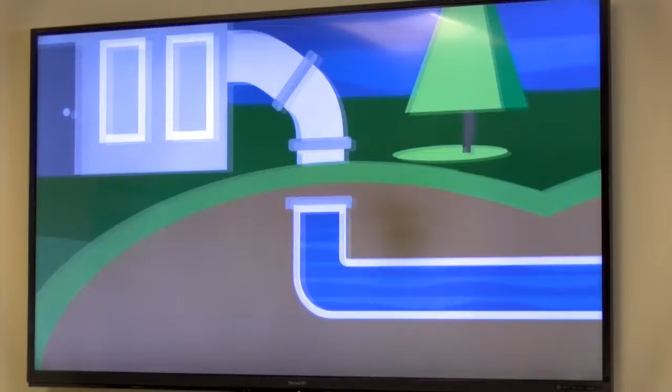By damming several small tributaries of the Escatawpa River, the waters backed up and began to expand. The ultimate result being a 3,600 square acre lake. Today, this lake is known as Big Creek Lake. The new infrastructure began with the intake facility on the far eastern edge of the lake. Featuring pumps powered by 800 horsepower engines, this lakeside facility is more than capable of meeting the needs of the metropolitan and ever-expanding Mobile region.

Equipped with the latest technology, including two 60-inch diameter pipes leaving the Gaillard pumping station for our Myers and Stickney reservoir facilities, the combined capability of the two facilities is a whopping 90 million gallons per day, but the typical demand for MAWSS customers is 5,000 gallons a month. At the Stickney and Myers reservoirs, the water is clarified, filtered, and disinfected. Our treated water from these two facilities exceeds federal guidelines and standards and is subjected to constant tests throughout the time spent at the reservoirs.

This process takes 7 to 15 hours, and water is then held in reservoirs before leaving on the last leg of the journey to your home or place of work. The water makes a trip through thousands of miles of underground pipes to customers throughout our community. This is the same water that you use in your kitchen to clean your clothes, to water your lawns, and is used to extinguish fires.

Delivering millions of gallons of water daily is only half our job at MAWSS. Every time you take a shower or flush your toilet, you send wastewater to our treatment facility. All wastewater must be cleaned and treated by rigorous environment-friendly standards so the water is healthy before returning back to nature. We have two wastewater treatment facilities in Mobile, Wright Smith and C.C. Williams wastewater treatment facilities. Here, particles are removed and the wastewater is clarified and treated.

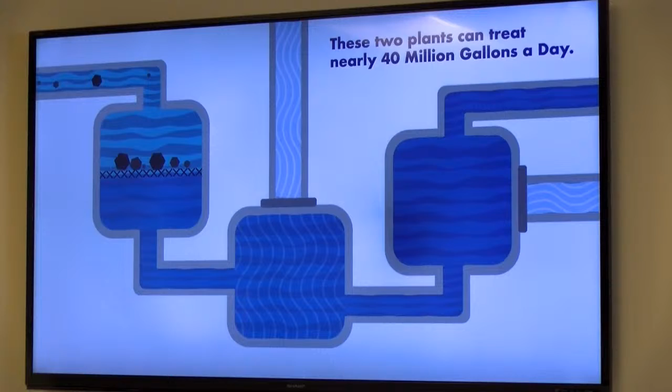This is critical for our environment and our community health. Providing clean, quality water and treating wastewater are important jobs. We are proud of what we do and the hundreds of safety-conscious MAWSS team members who are hard at work around the clock to bring Mobilians the sparkling, clean, refreshing water they depend on. We realize the important service we provide and never forget our work is only noticed if quality water is not meeting or exceeding standards, and that's truly a good thing.

What's on the screen is a summary of our assets. To understand the magnitude of our system, we have the raw water system, which includes Big Creek Lake, some pumping stations, some reservoirs, and 56 miles of pipeline from Big Creek Lake and the Mobile River systems, which are our raw water systems.

In our potable water system, we have 2 water treatment plants, the Stickney and the Myers, and about 1,605 miles of main pipeline, but I'm going to talk a little bit later about additional pipeline that adds to that and nearly doubles it. Then we have booster stations, 5 ground storage tanks, 9 elevated storage tanks, 3 reservoirs, 32,000 valves in this system.

12,500 fire hydrants roughly. And in the wastewater system, we have the C.C. Williams wastewater treatment plant, the Wright Smith wastewater treatment plant, 193 lift stations, 220 miles of force main attached to those lift stations, and 1,280 miles of gravity sewer main, 29,000 manholes roughly, 99,000 service laterals, 2 severe weather attenuation tanks, 3 decentralized systems.

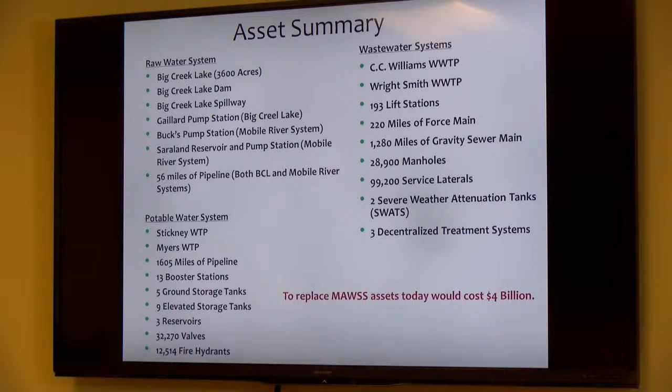When we did our master plan, one of the things we did was value our assets, and the consultants who studied the system determined that it would cost $4 billion to replace this system today. So that gives you a little bit of an idea of how big this system is and the value of it. I'm just going to walk through some aerial photographs of our system.

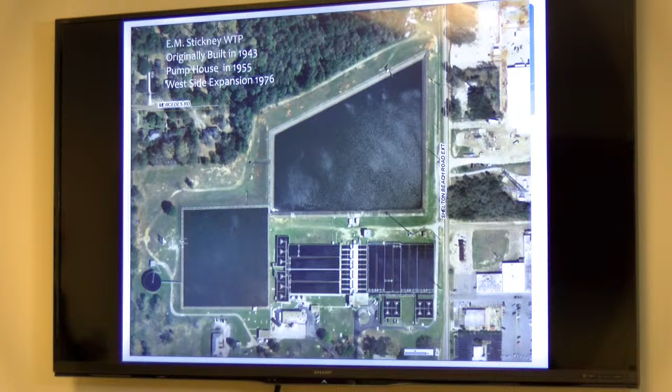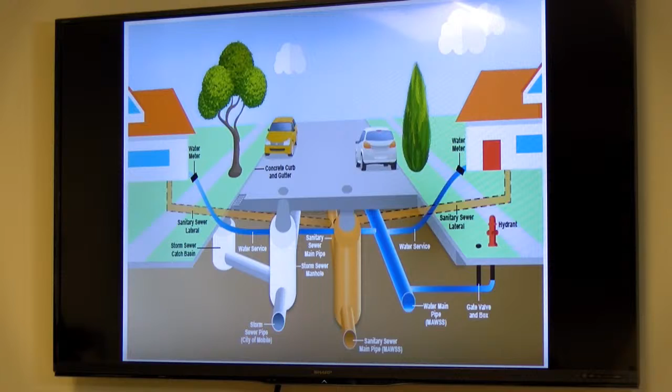What we'd like for the public to understand is that it's difficult to know as a customer what the condition of our assets is, because our most expensive assets are our pipelines. What this picture illustrates is that we have a separate water main that feeds services to homes. There is a separate stormwater system which is operated and owned by the city. And then there's a sanitary sewer system that provides laterals to homes and buildings that brings the wastewater to MAWSS for treatment.

This is a map that shows our water lines, and the water lines are aged. Some of them are over 100 years old. As this particular slide shows, we have 195 miles of cast iron water line that's over 100 years old, and then much more pipe than that, about 650 miles of pipe that's 50 to 99 years old.

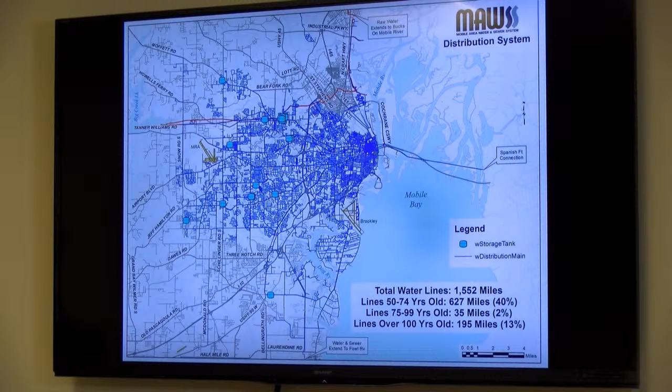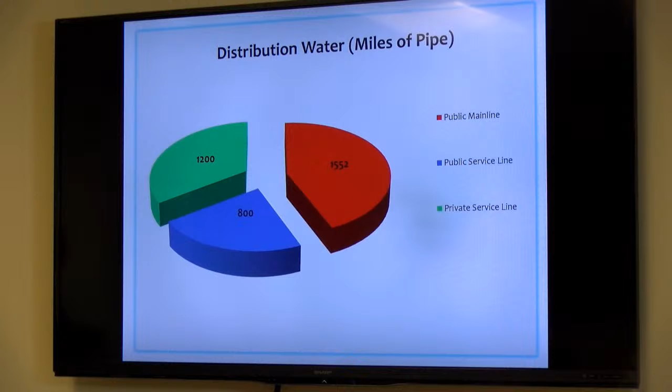The distribution system is made up of the water mains that bring water to the location of the house. Then we have the public service line that feeds water from the water main to the property line, and the private service line that takes that water from the property line into the home or building. Altogether, there's a total of roughly 3,500 miles of line necessary to serve water to the community.

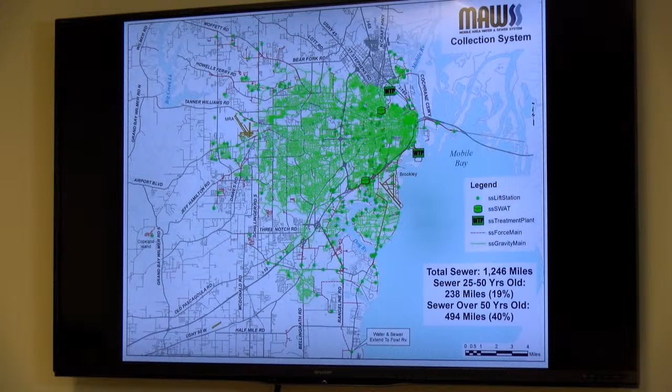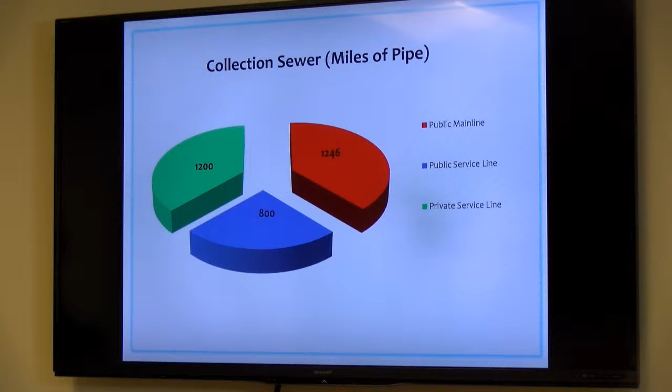On the wastewater side, the sewer that's over 50 years old is about 494, roughly 500 miles, and much of that sewer pipe is made out of either concrete or vitrified clay pipe, the same material flower pots are made out of. Here again, we have the public main line that takes the wastewater to the plants, the public service line in the right-of-way, and the private service line that brings wastewater from the buildings to the public service line, to the public main line, and on to the treatment plants.

Infrastructure ages a lot like a car. This is something we probably all know intuitively, but we don't think about it because it's out of sight and out of mind. As we know with cars, they get old with time, and you can make repairs over time, but after a while it costs so much to repair them that they have to be replaced to keep them functional and reliable. The same thing is true with infrastructure.

As we look at aging water distribution and sanitary sewer systems, in the aging sewer lines we have stormwater infiltration and inflow to the sanitary sewer that causes sanitary sewer overflows. We have hydrogen sulfide corrosion of the pipe materials used for sewers, predominantly for concrete that was used decades ago. Materials of construction in the past have basically reached their expected useful lives, which is usually about 50 years for a sanitary sewer system built in the past.

Defective sewer laterals on private property cause infiltration and inflow. Homes built decades ago, back when some of these sewer mains were constructed, have the same pipe conditions, materials, and problems as we do in the public system. And then we have more stringent regulations today from regulatory agencies about how to operate and maintain these systems. In Mobile, we have an even greater challenge, being one of the rainiest cities in the United States, so keeping stormwater and groundwater out of the collection system is a major challenge and one of the greatest expenses in renewing our infrastructure.

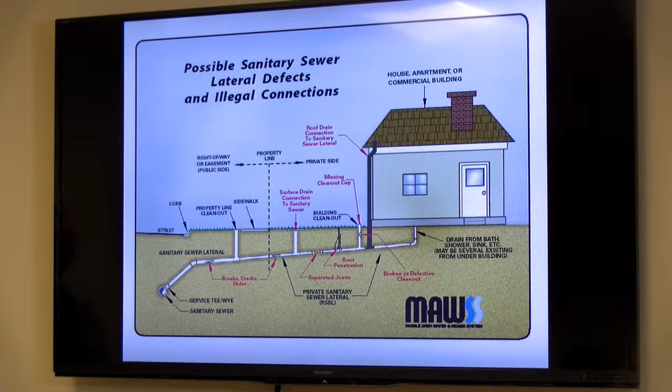I talked about private property, and this slide shows a dividing line, that dashed line running vertically, between the public lateral extending toward the street and the private lateral extending toward the home. This picture shows the various defects that can occur in those laterals: roots, broken pipe, defective building cleanouts that allow groundwater into the system and drain the yards, and so forth. All that water comes into a sanitary sewer system that was not designed to convey stormwater, and therein lies the problem. We exceed the capacity of the sanitary sewer system, and it basically fills and then overflows from manholes. That is something we've got to work to prevent.

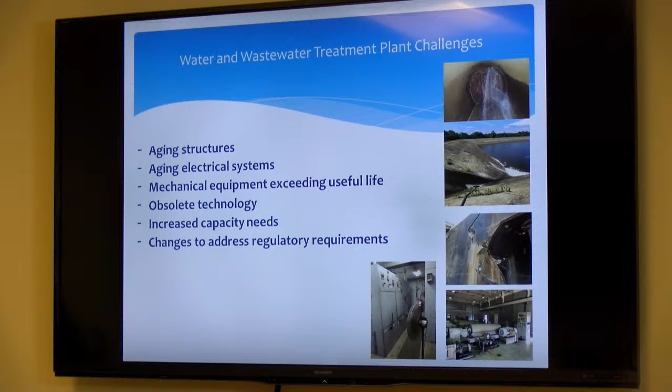In our water and wastewater treatment plants, we have aging structures, aging electrical systems, mechanical equipment exceeding its useful life, obsolete technology, increased capacity needs, and changes required to address changing regulations.

A year ago, when I was talking about the master plan, I listed projects that we were going to pursue, and I said I was going to come back and mention the status of those projects. This slide shows some of those projects, and there's another slide with a continuing list.

Projects are under construction in 2020, some started in 2019 but carried forward. The Eslava Creek Lift Station screen installation at $3 million is complete. The 3 Mile Creek wet weather storage facility and the 3 Mile Creek trunk sewer are 85% complete, a project predominantly designed to reduce wet weather sanitary sewer overflows on the 3 Mile Creek trunk line.

The digester dome replacement at Smith wastewater treatment plant is complete. The West Mobile trunk sewer extension is complete. AMI Phase 2, our automated meter infrastructure, is also underway.

Our assistant director over admin is going to talk a little bit about that later. We're also working with the city to ensure that when the city replaces or renews the right-of-way, basically replacing the streets, sidewalks, and so forth, that we're partnering with the city.

So the water and sewer infrastructure in those new streets can be replaced at the same time. This is a very good joint venture between MAWSS and the city, because it's the most economical way to replace the right-of-way and the infrastructure in it, so that when the street is finished, it's not only new on top, but also new down below in the water and sewer facilities. Each year we budget money for miscellaneous sewer system repair and rehab.

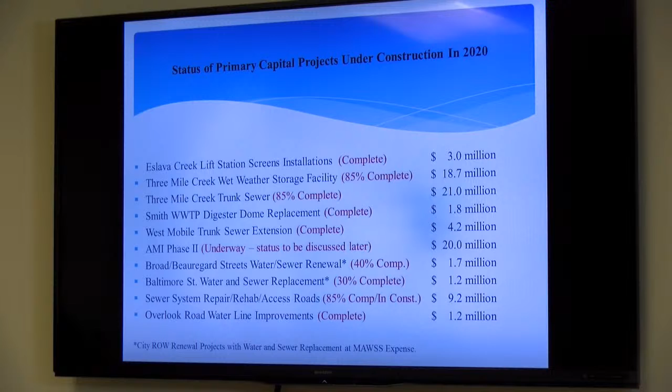So also some additional projects. The Big Creek Lake Dam Spillway Tainter Gate Automation Project is about 5% completed, just got started. The Dog River Drive Lift Station is about 70% complete. The force main relocations we talked about last year - one phase is complete, the second phase is 11% complete, and there are 4 total phases to this replacement.

The Smith Wastewater Treatment Plant Headworks project got started, it's 10% complete. Mainline valve replacements at the Bankhead Tunnel - some of you may remember that about 3 years ago we had a water main break at the intersection of Royal and Government.

During that break, water leaked into the tunnel. They had to close the tunnel and so forth. That was an indicator to us that we needed to do a project to replace the water lines around that tunnel, and that project is currently underway.

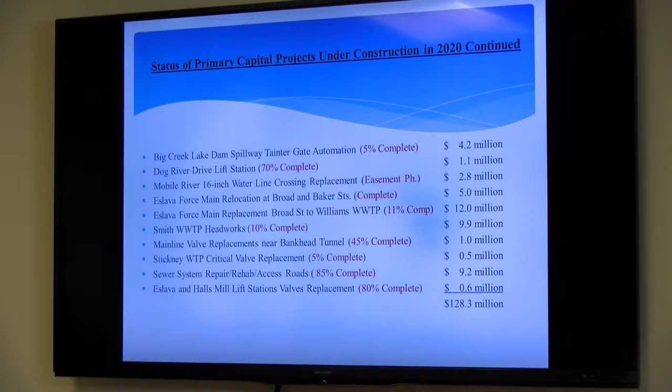Again, we had the sewer system repair at $9.2 million and the Eslava and Halls Mill lift station valve replacement at $0.6 million. I think the Stickney critical valve replacement might be a little longer in completion, and the sewer system rehab - I think that's redundant. So the total you see down there is actually about $119 million that we're pursuing in projects under construction in 2020.

Now, as we move into 2021, the projects we plan to bid and get into construction are the Eslava force main replacement from Broad Street to Perimeter Road, that's phase 3 of that force main replacement, and the Williams wastewater treatment plant dewatering facility at $26.5 million.

Stickney water treatment plant, 50 million gallon reservoir renovations at $7.5 million. Electrical upgrades to the Stickney plant at $10 million. Sewer system repair and rehab, $8.4 million budgeted for 2021.

Then some more street projects we're partnering with the city on - McGregor North water and sewer replacement, Texas Street water and sewer replacement, and St. Louis Street water and sewer replacement. So the main projects we're pursuing in 2021 sum to about $75 million.

Moving forward, some other projects reaching farther out to 2022 and later include the Eslava Force Main Perimeter Road, that's phase 4 of that project which would complete the replacement of that force main, at $15.6 million, and the Eslava Force Main Slip Lining Project at $7 million.

Stickney Water Treatment Plant Dewatering Facility upgrades at $10.3 million. And then the Eslava Creek Severe Weather Abatement Tank, a SWAT facility, and the associated relief sewer, about $50 million in projects for the purpose of reducing sanitary sewer overflows on the Eslava Creek trunk line.

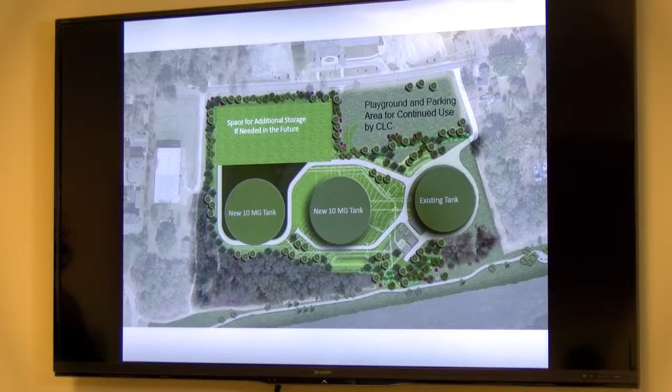But we think that all of these projects position us very well to serve the community in the future. I'm just going to show you a few slides about the construction of the 3 Mile Creek SWAT facility. This was the drawing that I showed last year as a proposed project, and this, of course, shows both the tanks and the trunk sewer. This is the construction of the tanks.

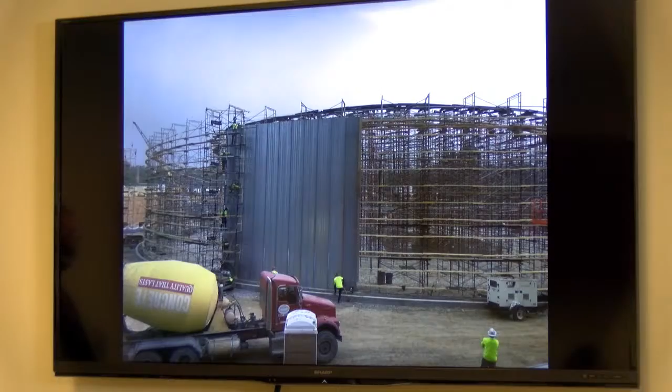Continued construction of the tanks. Contractor is shotcreting the wall of the tanks. And this is the tanks in their completed state. Although the project's not finished, the tanks are complete.

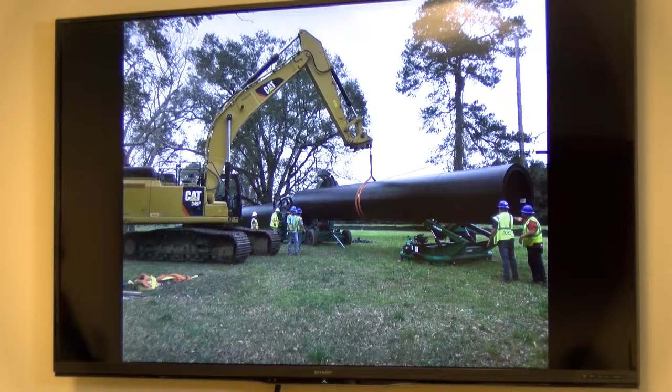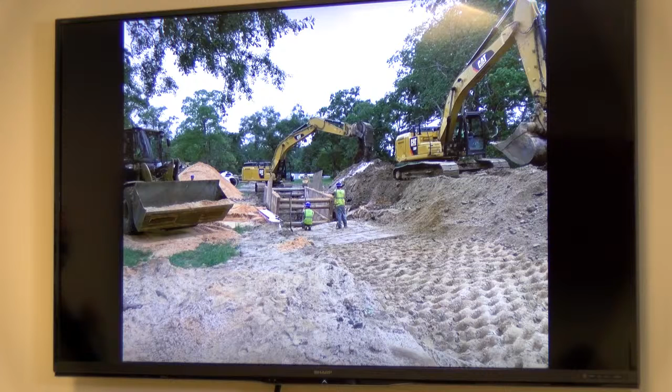The trunk sewer project and the SWAT project are estimated to be complete by either the end of the first quarter or first part of the second quarter in 2021, and then placed into service. This project and this facility is very similar to what we're proposing to build on the Eslava trunk sewer in order to address SSOs there.

So that completes my discussion about our projects, where we're headed in regard to the master plan. One of our big goals, of course, is to address and reduce sanitary sewer overflows in the system, and then upgrade it so that in the future we can continue to serve our customers as well as we possibly can. Thank you.

Hey, good afternoon. My name is Bud McCrory, I'm the Assistant Director over Administration here with MAWSS. Thank you for gathering with us tonight as we discuss our budget. I'm going to cover a few of the issues we are facing with our budget and some tough decisions the board and staff had to make in reference to that.

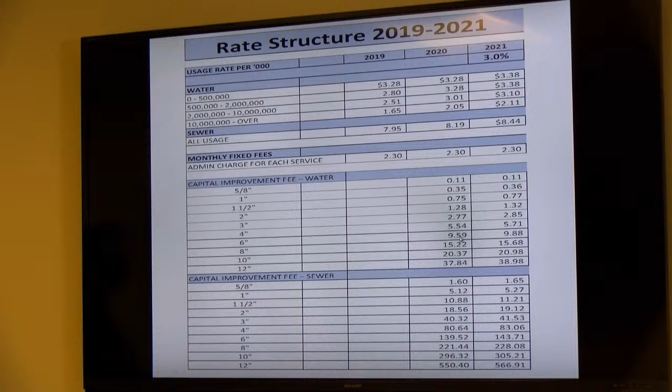We'll go from 819 to 844. This is our capital improvement fee and the charges related to it. Again, all this information is available on our website, and there's also a link under the description box on the live stream.

All of this funding is used to fund our current O&M and our capital improvement projects. So when we talk O&M, we talk about our operations and maintenance. We always look at this to see how we can make sure we streamline and be as efficient as possible here in the organization.

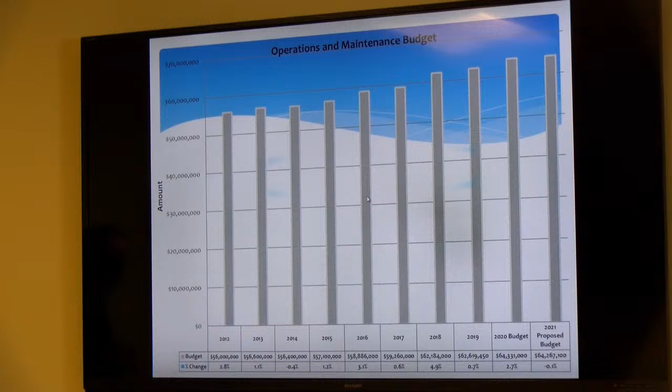I am happy to report that this year we actually have a negative 0.1% decrease in our O&M budget from the 2020 year. This is due to a lot of efforts on behalf of staff and just trying to be fair to our ratepayers. Average O&M increase over this 10-year period has been about 1.7%, but again, we're happy to report that we're at about negative 0.1% this year compared to last year.

Our current O&M budget is about $64,267,000.

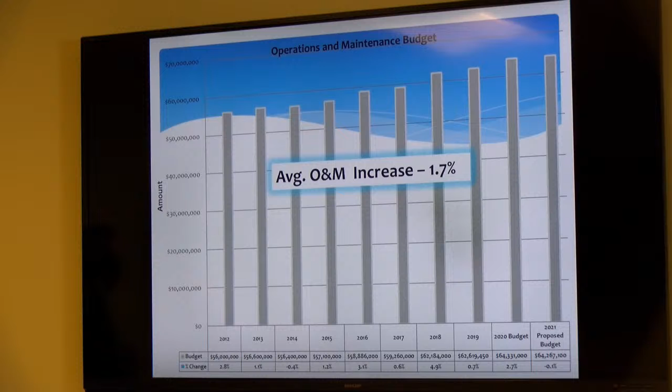So a few other assumptions, as Charles mentioned. It was a difficult decision as staff approached the board with the current proposed 6.5 rate increase last year. And due to COVID and some different things related to it, the staff felt that we need to reduce that by 3.5%.

So what we have proposed to the board is a 3% rate increase, and that was a very tough decision on both staff and the board. But due to the current need of our infrastructure, it was felt that we would move forward with a 3% rate increase. Some other assumptions, I'll talk a little bit about these a little later here.

We're talking about a 10% late fee, which is applied to those customers who are not paying on time. The board felt it was in the best interest of all of our customers that we waive that 10% late fee, and we waived it from March at the beginning of the COVID crisis until September the 23rd of this year. That waived fee was about an $800,000 hit to the board and to our current budget.

We also, as I mentioned earlier, and why we saw the decrease in our pay-go numbers going down, is that we're showing about a $7.3 million shortfall from what our anticipated revenues were to be. The reason is because we're basically having some businesses who aren't using as much water, and you can relate that to restaurants and different things that were closed for a period of time and then are opening up to limited seating and all of that.

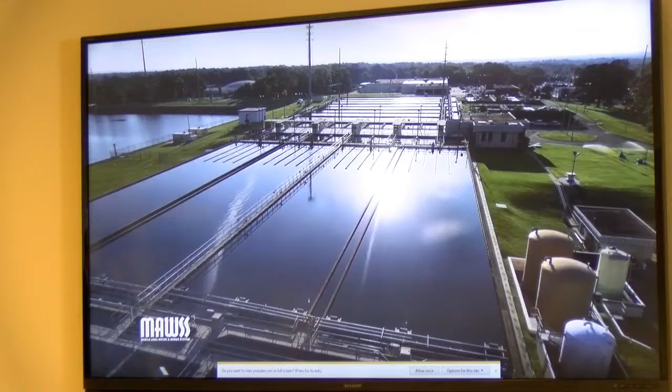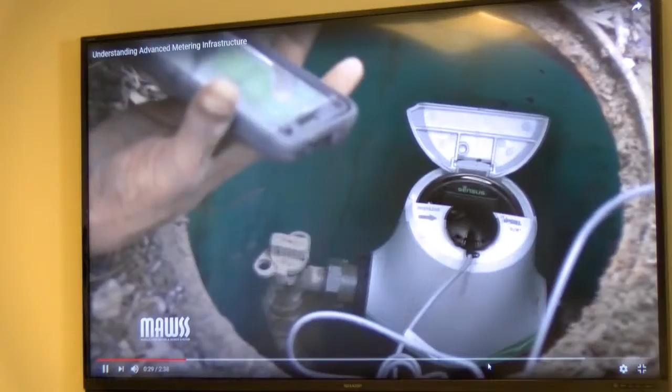At MAWSS, we're continually making improvements to keep water safe and working for you. Part of that effort is integrating a system-wide upgrade with Advanced Metering Infrastructure, or AMI. This project will replace the outdated meters of our area, providing residents with state-of-the-art meters that will ensure more accurate meter reading and improved billing accuracy. The technology uses radio frequency to transmit water usage to a MAWSS database every 4 hours. This new technology will also allow MAWSS meter readers to be absorbed into other MAWSS departments to better serve our community.

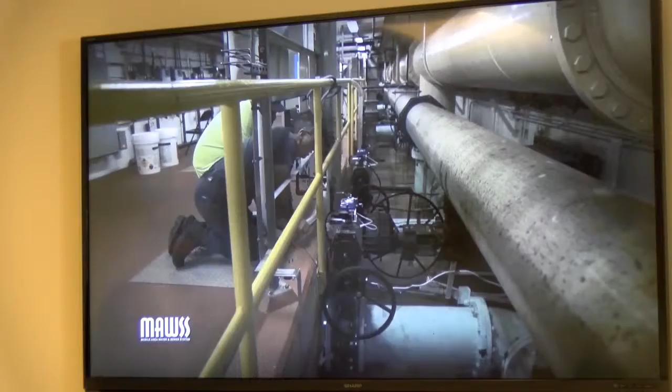When your smart meter is installed, you can sign into your MAWSS account and set up alerts to your email. Alerts will display your water usage on a daily or weekly basis when the amount of your choosing is reached. You can also view or monitor your water usage online and detect leaks sooner when a shift in water usage is substantial. These alerts provided by the new AMI system will aid in budgeting and conservation of water for potential savings. Creating an account is simple.

Go to MAWSS.com and click on the My MAWSS Account button to create or log into your MAWSS account. After signing in, click on My Smart Meter, which will redirect you to a new page where you can view your billing cycle, usage, and data, or set up alerts. To set up your alerts, click on Configure under the Billing Cycle Threshold section. Here you can set your water usage preferences to receive alerts and notifications.

To turn on these alerts, simply check Enable. Then on the sidebar, click on Alert Recipients. Check the box for whatever type of notifications you desire and click Save. If you wish, you can also add other recipients' names and their email addresses on this page. You may also activate alerts within selected dates for peace of mind when you're on vacation or away from your property for an extended period. If your water usage exceeds a selected amount within those days, you will receive a notification.